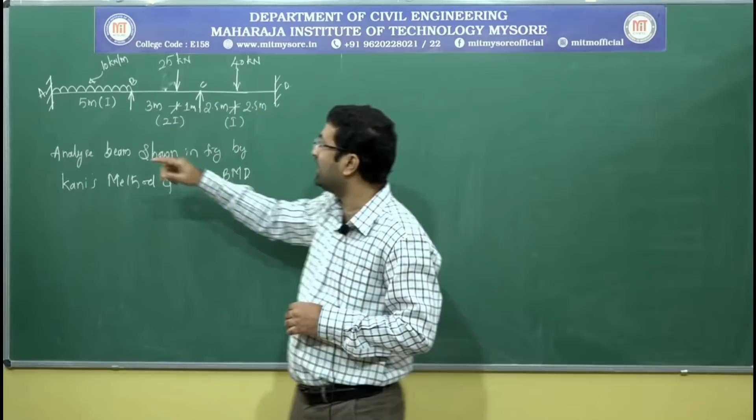Here you can see the variation of the I value. For span AB, the moment of inertia value is I; for span BC the moment of inertia value is 2I; and for span CD the moment of inertia value is I.

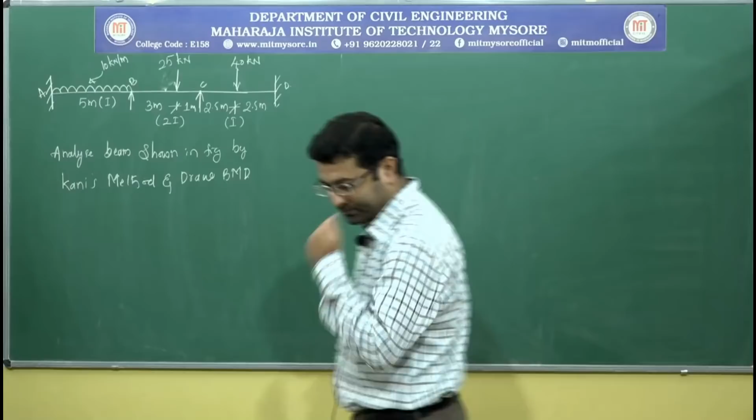We have to analyze this beam using Kani's method and draw the bending moment diagram. Here in the problem they have asked only to draw the bending moment diagram, so whenever that's the case there will be slight changes at the end - we don't need to calculate the support reactions. We can directly draw the bending moment diagram with the help of the second approach discussed in previous classes. As in the slope deflection method and moment distribution method, the first step in the analysis of a beam by Kani's method also remains the same: the estimation of the fixed end moments.

Let me start with the solution. Step one: fixed end moments.

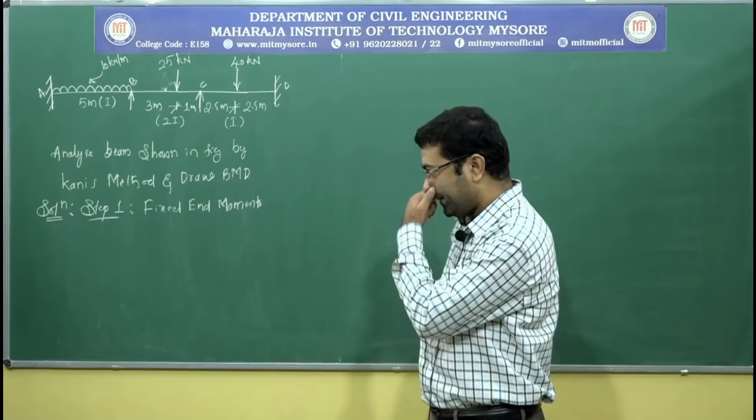From the last two modules we have been discussing how to calculate the fixed end moments, so here also we will use the same kind of formulas to work them out.

For the first span you can see we have a UDL on the span. So the fixed end moment for span AB, MFAB, is equal to minus WL square by 12. Here W, the magnitude of the load, is given as 10 kilonewton, so it is 10 into L. L is the span of the beam, which is 5 meters, so it's 5 square divided by 12, which yields minus...

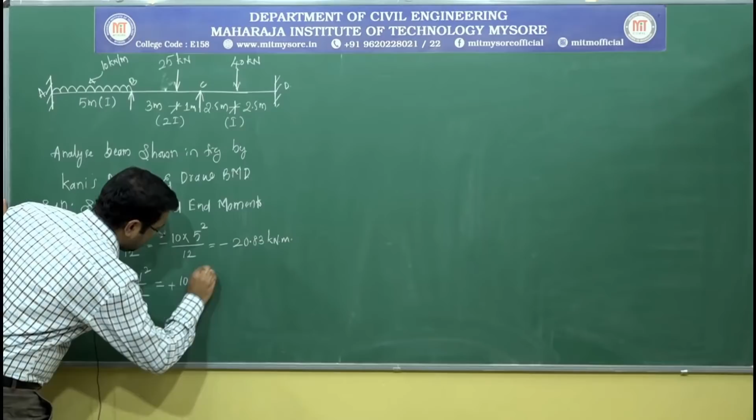...20.83 kilonewton meter. This is the fixed end moment for span AB at point A, MFAB. Now similarly I have to calculate one more fixed end moment at point B, MFBA, which is plus WL square by 12. Here only the sign changes, everything else remains the same, so you can expect the same answer, only the direction changes: plus 20.83 kilonewton meter is the fixed end moment at point B, MFBA.

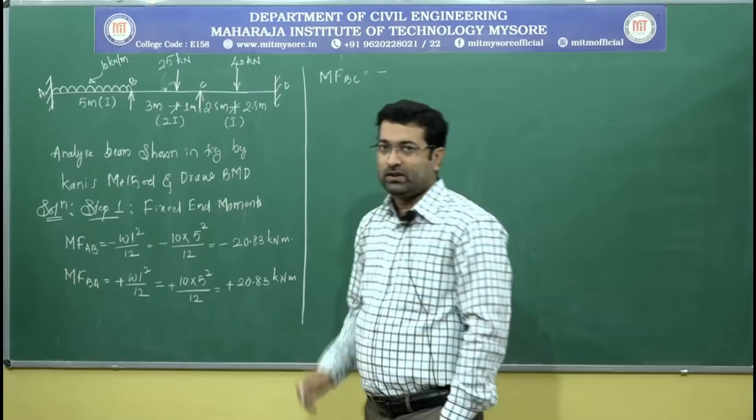Now similarly for the second span, span BC, we need to work out the fixed end moments. MFBC is equal to... on span BC we have an eccentric concentrated load, so as the load is eccentric we need to use the formula W A B square by L square. This is the formula to work out fixed end moments whenever we have an eccentric concentrated load.

So it's minus, here W is 25 kilonewton, so it is 25 into A. The distance A, from point B to the load, is 3, and the other distance is 1 meter, so it's 1 square divided by the total span squared, which is 4 square. This yields minus 4.69 kilonewton meter. This is the fixed end moment for span BC, MFBC.

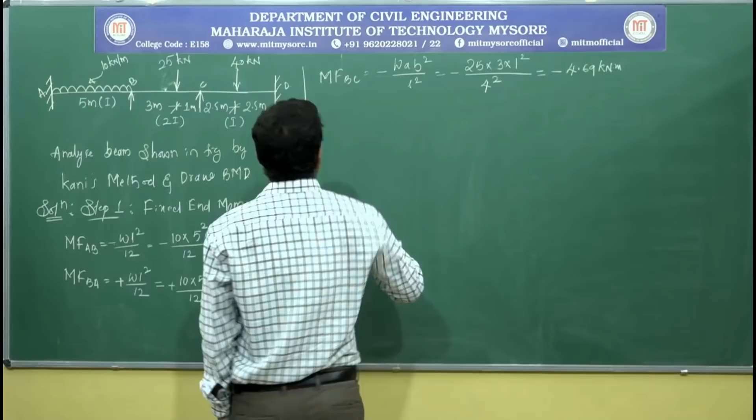Similarly, we need to work out one more fixed end moment for the same span, MFCB, which is equal to plus W A square B by L square. Here, the load is 25 into A square, A remains 3, so it will be 3 square into B, which is 1, whole divided by 4 square. This yields a value of 14.06 kilonewton meter, which is the fixed end moment.

So these are the two fixed end moments for span BC. Now similarly, we need to work out the fixed end moment for span CD, that is MFCD.

So you can see here on the span CD we have a 40 kilonewton concentrated load acting exactly at the center. So you can use the formula minus WL by 8. W is the magnitude of the load, that is minus 40 kilonewton. The total span is 5 meter, divided by 8, which gives you a value of minus 25 kilonewton meter. That is the fixed end moment at C.

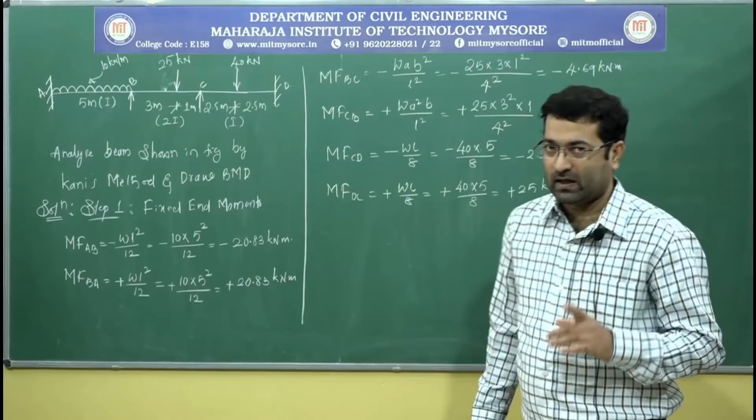Now we need to go for the second step. As I told you earlier, the second step is estimation of the relative stiffness and the rotation factors, which is very similar to the distribution factor what you have calculated in the moment distribution method. I will erase this.

Step number 2: relative stiffness, that is the value of K, and the rotation factors, which we have designated as U. So to calculate the rotation factors, we need to go for a table. The table is very similar to the moment distribution factor table what we have done in the moment distribution method. So here first

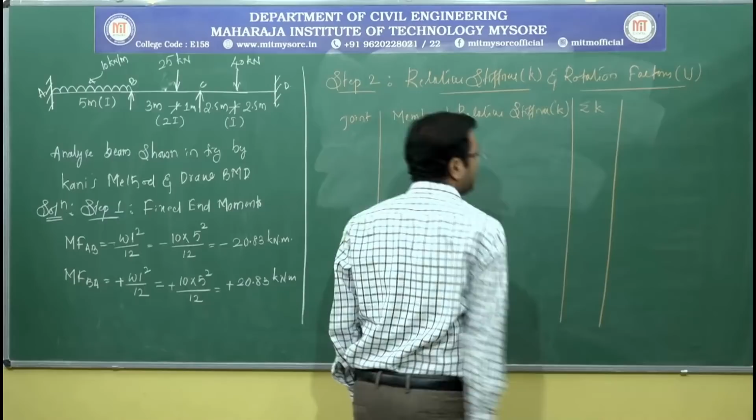We need to note down the joint, then the members at the joint. Then we have to calculate the relative stiffness, that is we need to work out the value of K. After the K, total stiffness, that is summation of K. Then we need to go for the distribution factor, which you already know. Then the last one is rotation factor.

Rotation factor u is equals to minus half of k by summation of k, or even you can write it as u is equals to minus half of distribution factor. Anything is fine, since k by summation of k is nothing but a distribution factor. So you can use any of the formulas.

Now, if I see the given loading diagram, you can see there are two intermediate joints, one is B and another is C. So I will note down them, one is B and another is C. Now at point B we have two members, one is BA, another is BC. So I will note down those here in the members: BA and BC.

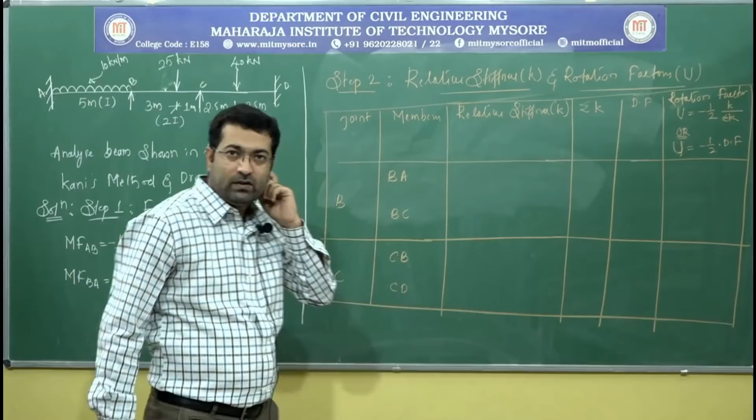The relative stiffness, the value of K, we need to determine. So to determine the relative stiffness, we usually observe how is the far end condition. For example, if I want to determine the relative stiffness for the BA member, B is the near end and A is the far end. So we need to work out the far end.

So here far end is fixed. For fixed far end, the relative stiffness formula is I by L. So how much is I value? I value is I, no change. So it is I by L, and L is 5 meter here. So this gives me a value of 0.2I, which is the relative stiffness of member BA.

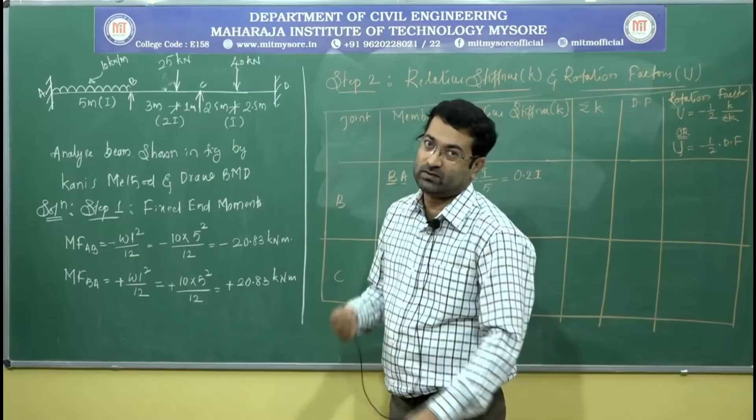Now for member BC, B is near end and C is far end. So how is the far end? Here it is a continuous or intermediate support. In structural analysis we treat all the intermediate supports as fixed. That is a basic assumption we made in structural analysis. All the intermediate supports are treated as fixed support. So C, it is an intermediate support.

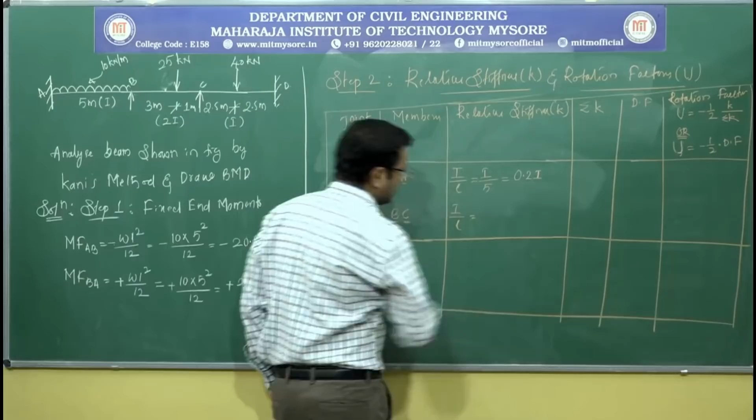So this support, even though actually it is simple in nature, it is treated as fixed. So now for BC member, C is far end, and since it is an intermediate support, we treat it as fixed support. For fixed support, the relative stiffness is again I by L. So I value here for BC member is 2I, and L is 4 meter. That gives you the value of K as 0.5I.

Similarly, if I come to joint C, for joint C we have CB and CD as the members. For CB, C is near end and B is far end. Here the far end is again, as like previous, an intermediate support, and all intermediate supports are treated as fixed. So it is I by L. The I value is again 2I.

L is 4 meter, so this is 0.5I. Lastly for CD member, C is near end and D is far end. Here for the given problem, support D is fixed in nature, so the relative stiffness is again I by L. I value is I, no change, so it is I divided by L. L is 5 meter. So this is 0.2I.

Now the next one is total stiffness at each joint. We have to work out how much is the total stiffness. We have two joints, B and C. For B joint, the total stiffness is 0.2I plus 0.5I, so it will be 0.7I. Similarly for C joint, we have two members, 0.5I plus 0.2I, so this is also 0.7I.

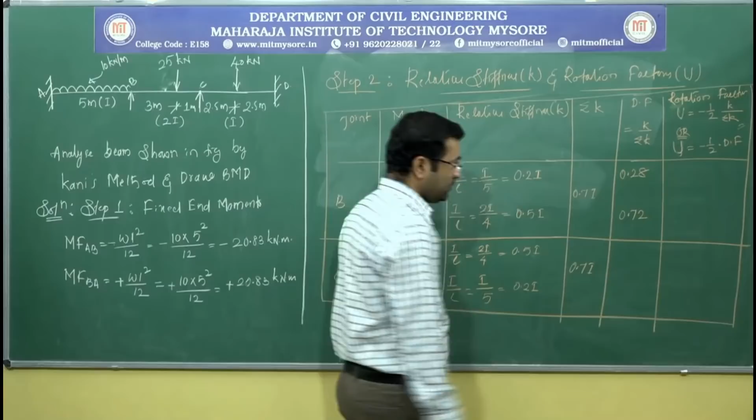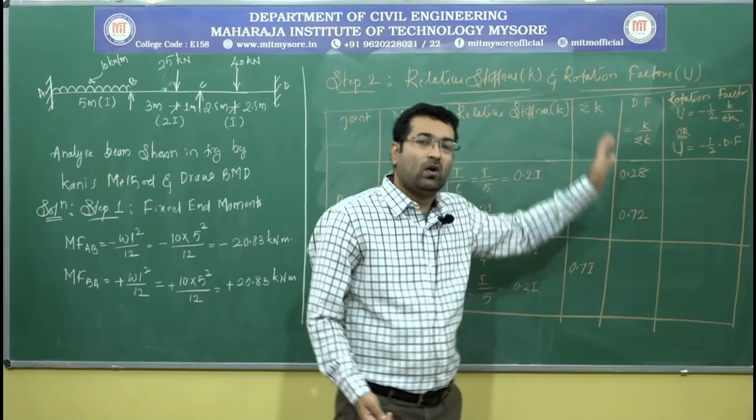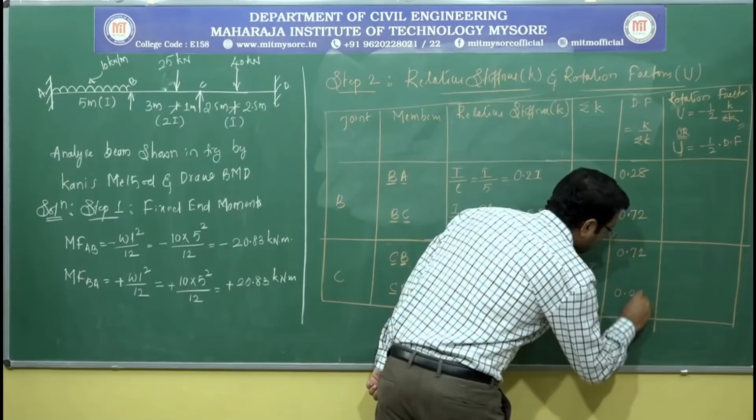Remember, the total distribution factor at any joint is exactly equal to 1. If you add these two, it should be 1. This is a cross check you need to do in step number 2. If it is not 1, assume your calculation has gone wrong, and all further calculations will be wrong, so please verify this. Similarly, 0.5 by 0.7 gives 0.72, and 0.2 by 0.7 gives 0.28.

Now the relative stiffness, rotation factor: the rotation factor equals either this formula or this formula, I will use this one. U is equal to minus half of the distribution factor. Minus half of 0.28 is minus 0.14. Exactly half of this, just use the negative sign. Half of 0.72 is minus 0.36. So minus 0.36 minus 0.14.

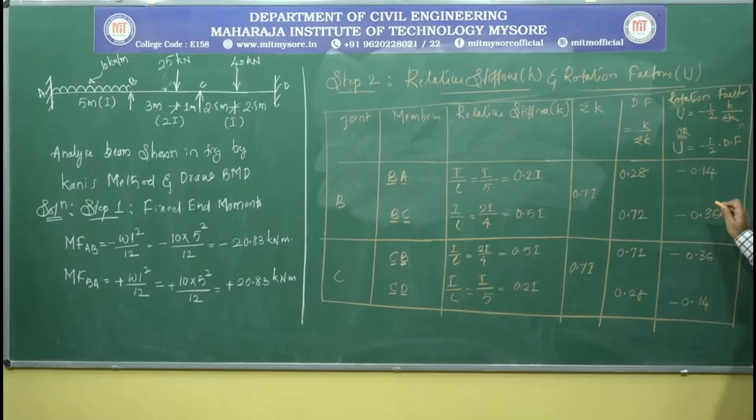Now here we have one more cross check. As like the total distribution factor at any joint must be 1, the total rotation factor, at any joint must be minus 0.5. So if you add these two, it will give exactly minus 0.5. Similarly minus 0.5. If these values are correct, then step number 2 is correct.

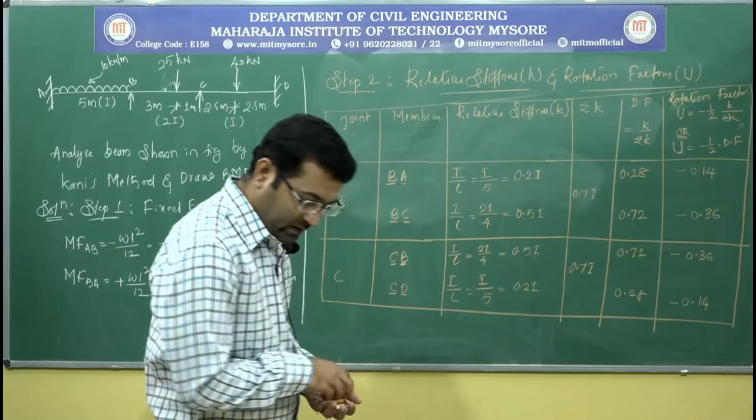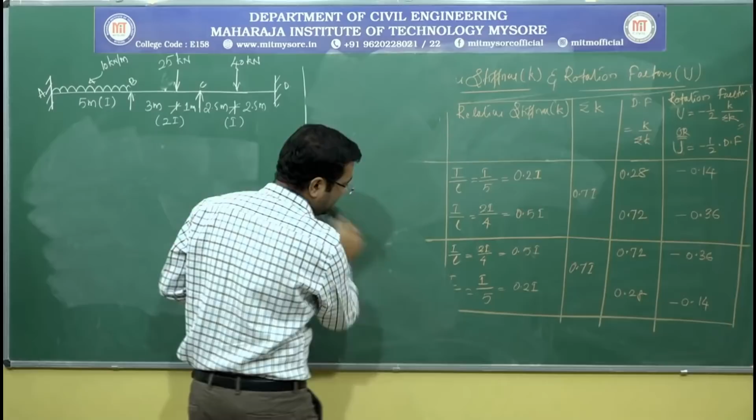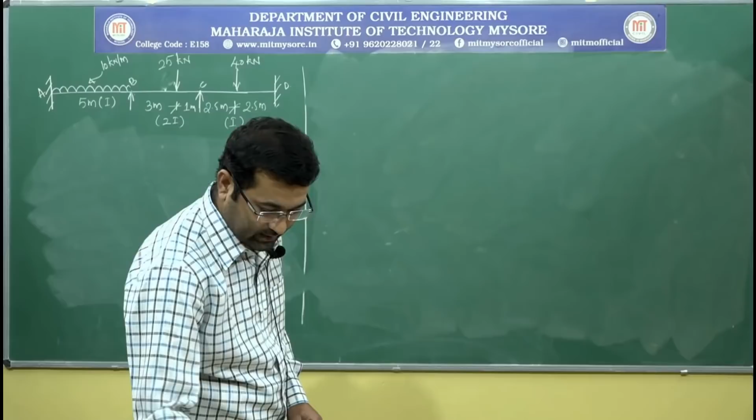So now we need to go for step number 3, which we call Kani's table. This is step number 3, the Kani's iteration. It is a kind of iterative step, like a moment distribution table, where we calculate many values again and again. Here in this step we calculate the rotation contributions, which we discussed in the last class.

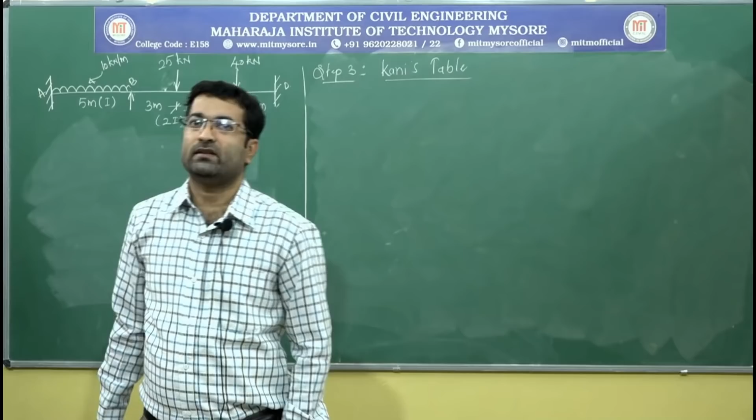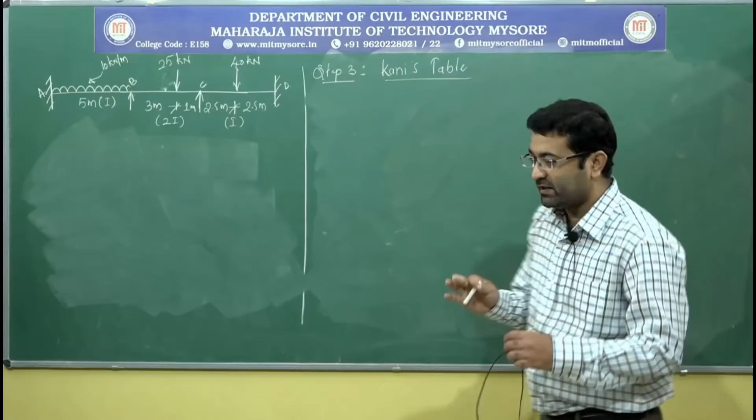Step 3 is Kani's table, or you can write it as Kani's rotation table, Kani's rotation contribution table. I would like to keep it simple: Kani's table. Here the representation of the table is a little bit different. It is not just a table, it is something different. Let us see how Kani has represented the table.

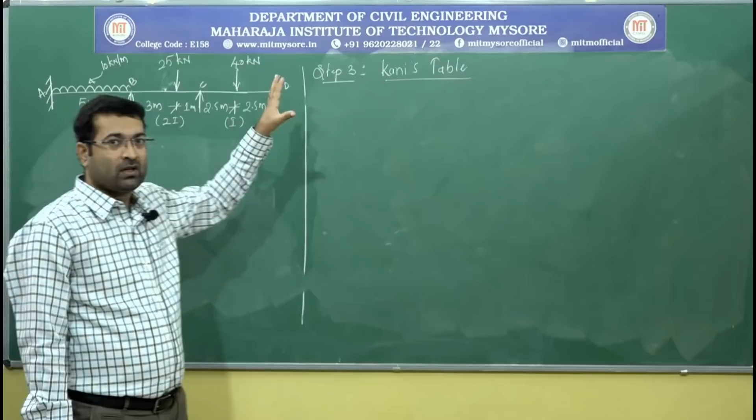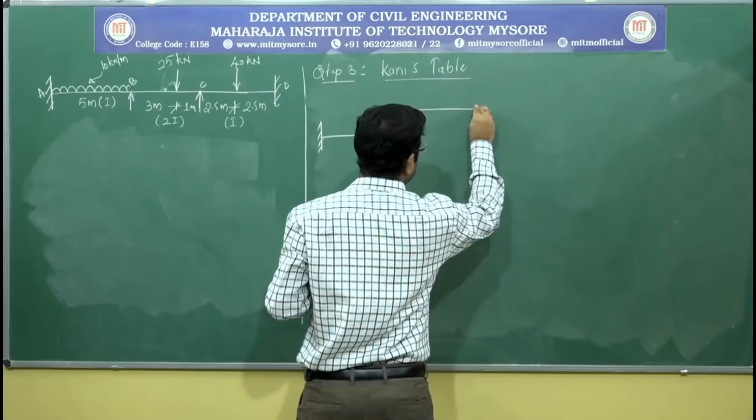Kani has shown the given structure or frame as it is, replacing all the intermediate joints by boxes, and not shown any given loadings. I will show support A as it is, then span AB as it is, no change. Now instead of an intermediate joint, I will represent the joint by a box. Next, I will represent span BC as it is, and now I will show joint C by another box.

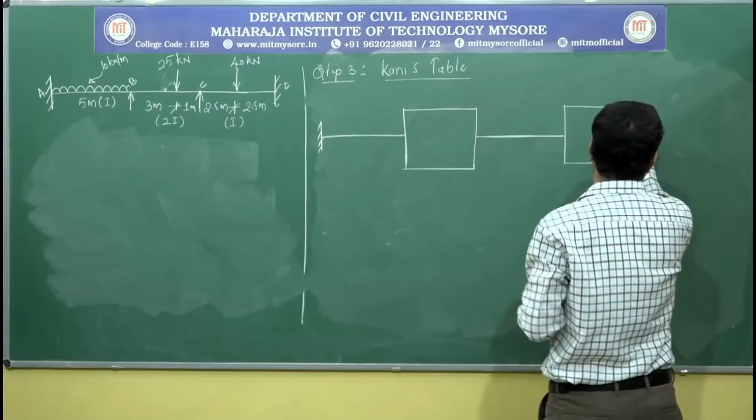Okay, then I will show the span CD as it is, then the support D. So here what we have done, we have just replaced the joints by boxes. So I will go for a little more further modification. In these big boxes, I will show one more small box, okay, and I will join these lines. So this is how Kani has represented the joints.

Similarly, here also, okay, so we will join these, right. So this is end A, as we know, this is joint B, this is joint C, this is joint D. So this is how Kani has represented the table, okay. So it is not just like the other tables, it is something different.

Now, what are the things we need to note here? So first of all, we have calculated the fixed end moments. So we have to represent all the fixed end moments in the Kani's table. So here the fixed end moments we have to represent somewhere here.

The fixed end moment for member AB, that is MF AB, it is minus 20.83. Here I will not mention the units, units are kilonewton meter, because we need more space. So it is 20.83 kilonewton meter, and MFBA, here I will represent it as plus 20.83, okay. And here that is MFCB.

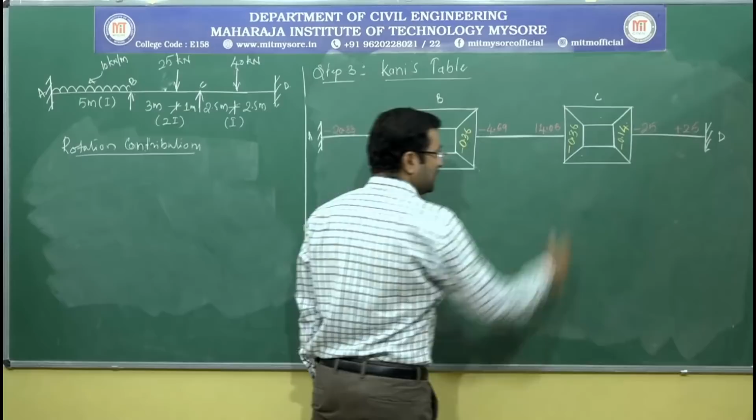So you see m dash AB, this is the rotation contribution at end A, which we are not calculating or we are not worried about. Similarly, m dash DC, that is the rotation contribution at end D, we are not calculating that value also. What we are calculating is m dash BA, m dash BC, m dash CB, and m dash CD. So we are working out or estimating only these rotation factors at the intermediate joints, right.

Now, as per our understanding from the previous classes, the rotation contribution m dash is equal to U, that is the rotation factor, into the algebraic sum of fixed end moments at any intermediate joint, plus the algebraic sum of far end rotation contributions. So this is the formula, right.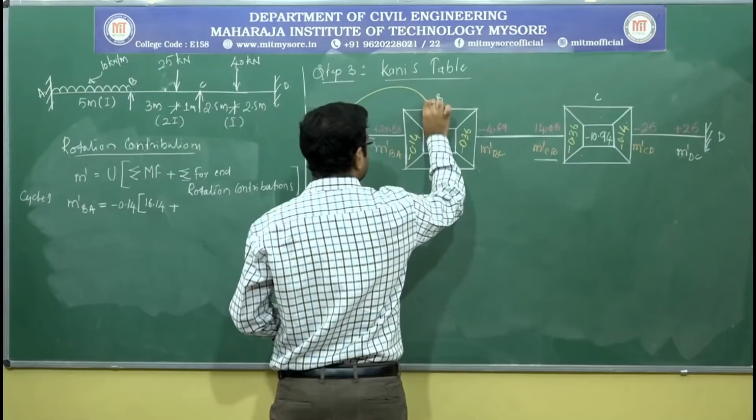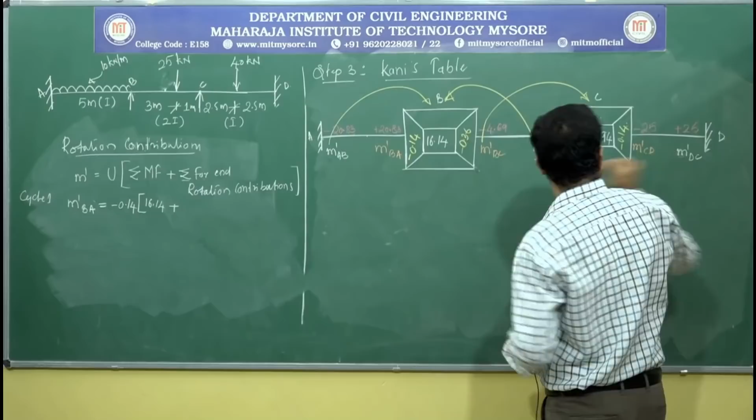I will show a simple diagram to help you understand. Whenever we are calculating values at joint B, for BA and BC, to calculate the rotation contribution for these two members we need to consider these values here, and we need to use them. Similarly, when calculating the rotation contribution for M dash CB and M dash CD, we need to use these two values for the calculations. If you draw this, it will be very helpful for you to understand.

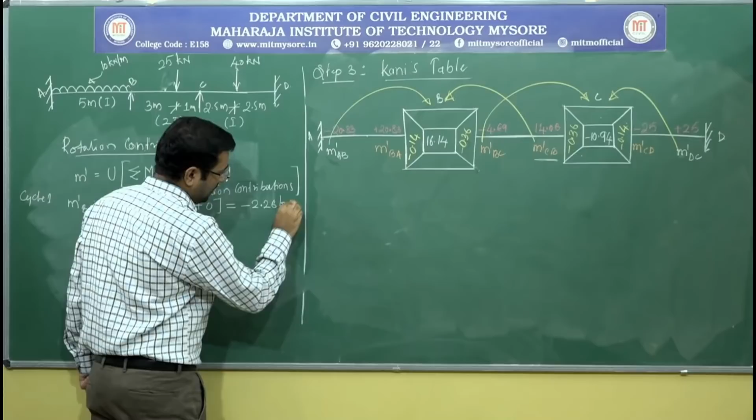Now see here, the far end rotation contributions. For joint B we have two members and these are the two far end rotation contributions. Right now these two are 0 because in the first cycle we have not done anything, so it will be 0 plus 0, 0 plus 0. This gives you a value of minus 2.26 kilonewton meter, which I need to write here below this, that is minus 2.26. So this is one rotation contribution value in the first cycle.

Similarly, we need to work out M dash BC, M dash CB and M dash CD. All are calculated exactly the same way. Now to calculate M dash BC, again I will use the same formula, that is rotation factor. The rotation factor for BC is minus 0.36, into the algebraic sum of fixed end moments for joint B, which is 16.14, plus the far end rotation contribution for joint B.

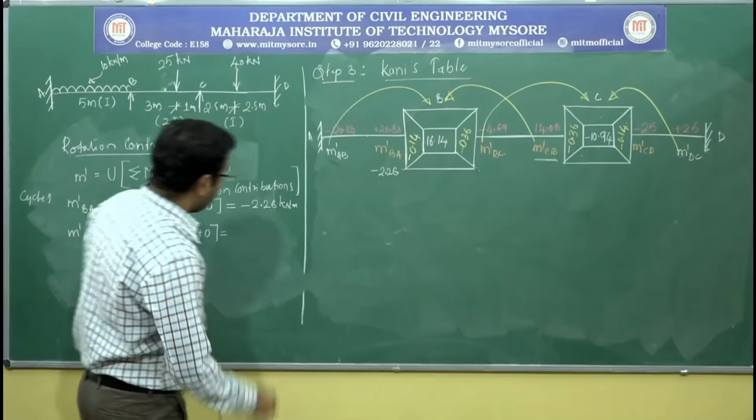These two are the far end rotation contributions, right now they are 0, so I will use 0 plus 0. In the first cycle they will be 0, but not from the second cycle onwards. So this gives me a value of minus 5.81 kilonewton meter, which I need to represent here as minus 5.81.

Now M dash CB. Again I will use the same formula, that is rotation contribution. The rotation factor for CB member is minus 0.36 into the algebraic sum of fixed end moment at joint C, which is minus 10.94.

Plus the far end rotation contributions. What are the far end rotation contributions for joint C? They are M dash BC and M dash DC. Here M dash BC we have got the value, so I need to use that in the calculation, that is minus 5.81, plus M dash DC, which is 0. So this gives me a value of 6.03.

6.03 kilonewton meter. So that I need to represent here, 6.03. Now the last value, M dash CD.

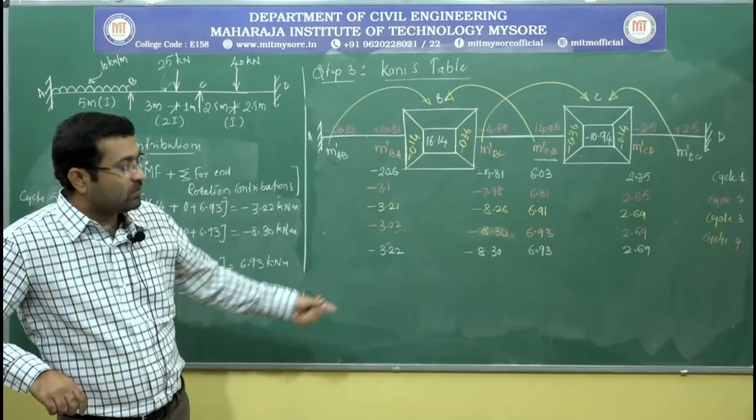2.69. So whenever the values have repeated, you can say that we can close the iterations, or we can close the cycles, because even if you go for further cycles you will get the same values. So no need to do the repeated calculations again and again.

So what I will do is finalize these rotation contributions. These are the final rotation contributions which we need to use for the calculation of the end moments. Now tell me one thing, what is the final rotation contribution for M dash AB? It is 0. It is 0, and similarly the final rotation contribution for M dash DC, that is also 0, right?

So using this we need to go for the calculation of the final end moments, that is step number 4. Final end moments. So in the previous class we have seen an equation to calculate the final end moment, so that I will use, and which will remain same for all the members.

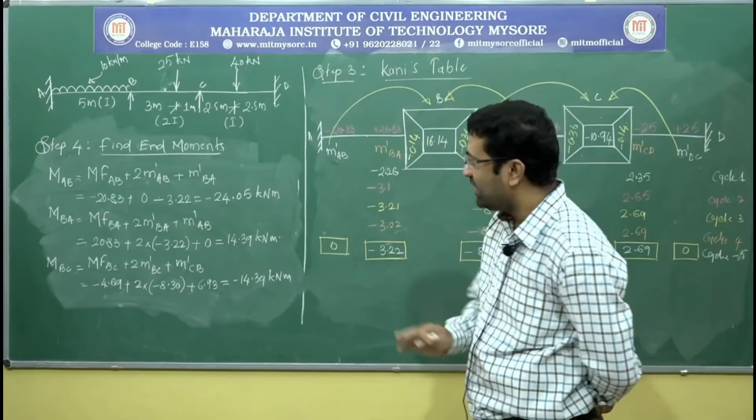If they are equal and opposite, then we can say that our calculations are correct. If they are not equal and opposite, then you can straightforward assume that your calculations has gone wrong. So please verify your calculations.

In the similar way, if I calculate the remaining things, that is M dash CD, M AB, BA, BC, CB. M CB is equals to MF CB plus 2 times of M dash CB plus 1 times of M dash BC. So MF CB is 14.06.

Plus M dash CB is 6.93, so it is 2 times of the 6.93 minus M dash BC is 8.30, which fetches a value of plus 19.62.

Kilonewton meter, right? And for the last span, MCD is equals to MFCD plus 2 times of M dash CD plus M dash DC. That gives me a value of...

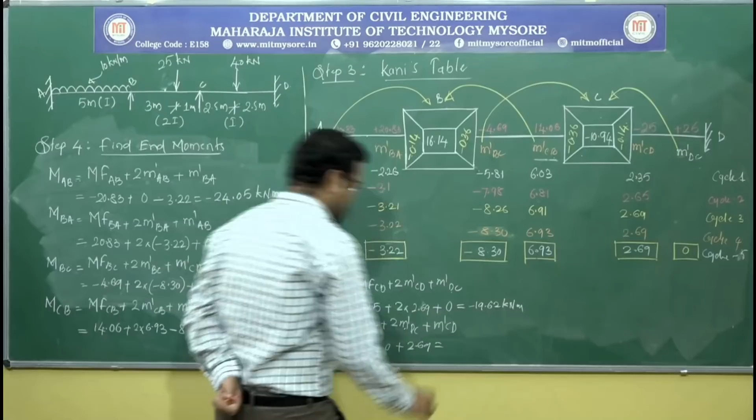minus 19.62 kilonewton meter. And lastly, for MDC is equals to MFDC plus 2 times of M dash DC plus 1 time of M dash CD. So it is plus 25 plus M dash DC is 0 plus 2.69. That gives me a value of 27.69 kilonewton meter. So these are the final end moments as per the Kani's procedure.

So once we calculate these end moments, we need to represent them into the loading diagram. Okay, so MAB,

As per our calculation, it is minus 24.05. Minus 24 means it is a negative value, so we need to represent this as anti-clockwise in the direction. So here it is,

24.05 kilonewton meter, and MBA, as per our calculation, we got it as positive value 14.39. So positive value indicates it is clockwise in the direction. So let me represent a clockwise moment here. It is 14.39

Kilonewton meter. So MBC, same value but opposite in the direction, anti-clockwise. So here it is clockwise. Next I will represent this. You can see here it is anti-clockwise, but the magnitude will remain same, equal and opposite. So the joint is in the equilibrium position.

For CB member, you can see it is 19.62. It's a positive value. Positive value means it is clockwise in the direction, right?

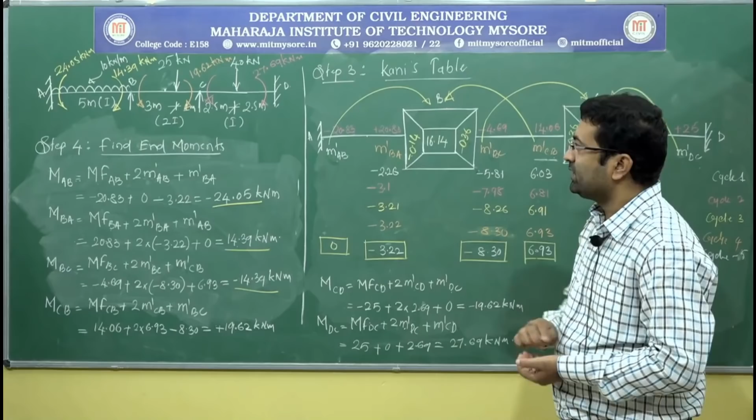So in the problem we can observe that they have asked us to draw only the bending moment diagram, not the shear force diagram. So as they have asked only bending moment diagram, we can draw the bending moment diagram without any further calculations.

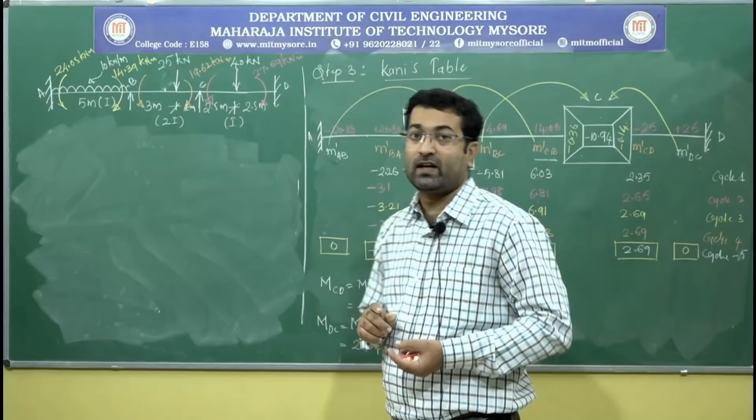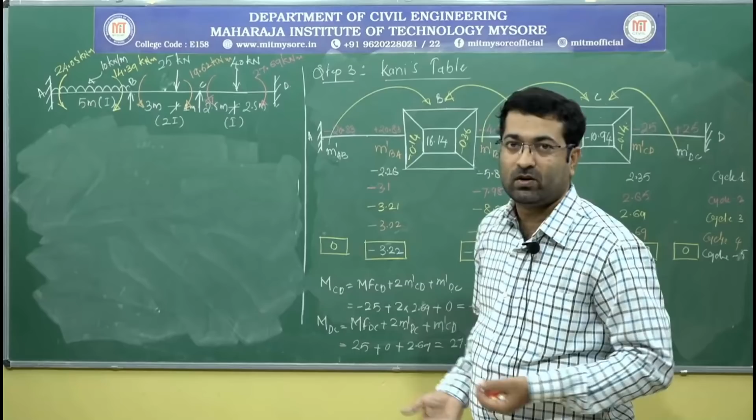But if they have asked us to draw the shear force diagram also, then we need to go for one more step, that is support reactions and the maximum bending moment calculations. So that part is not here, it is not asked in this particular problem, but in the next problem they will ask, or it will be there in the given.

So what I will do, I will straight away draw the bending moment diagram. I will just extend the projection lines so that it is easy for us to draw the bending moment diagrams.

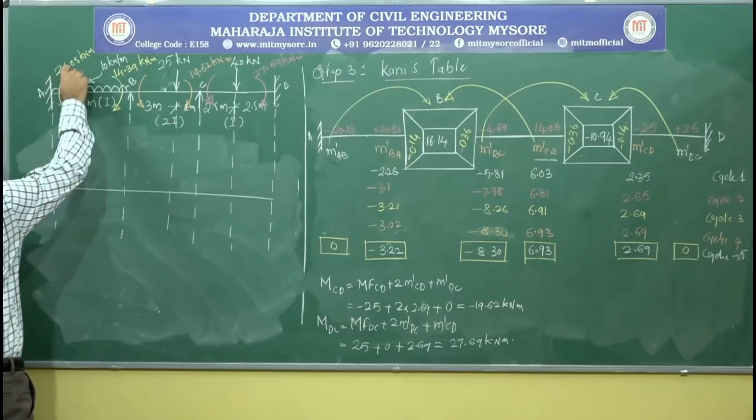Now you can see the bending moment at A is 24.05 kilonewton meter, and at joint B it is 14.39 kilonewton meter. Here it is 19.62 kilonewton meter, and here it is 27.69 kilonewton meter. So straight away you join all these bending moment values.

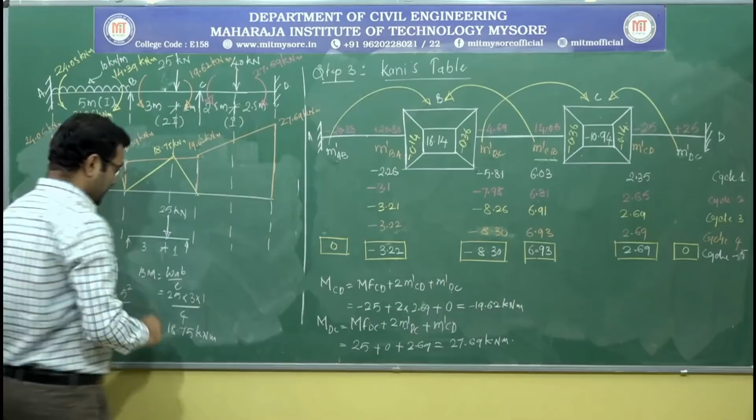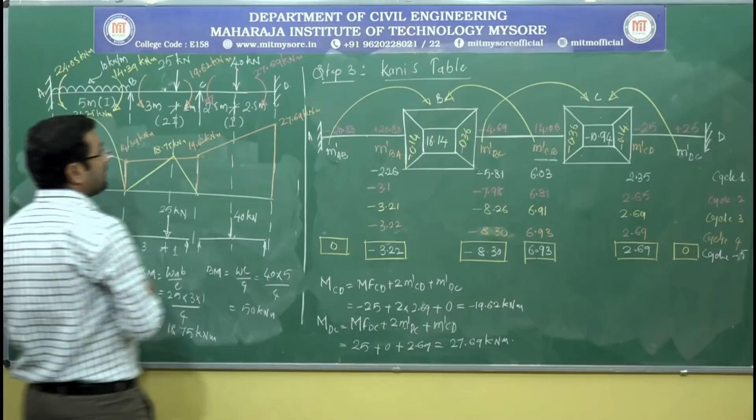For the third span, a central concentrated load of 40 kilonewton is acting, and the maximum bending moment is calculated using the formula WL by 4. So W is 40 kilonewton, L is the total span of 5 meters, divided by 4, giving a value of 50 kilonewton meter, which I need to represent. So here it will go a little up, because of the concentrated load the variation is linear. So this value is 50 kilonewton meter.

So here what we do is take this as the datum. The bending moment diagram above the line will be positive, and below it we treat as negative. So this also we treat as negative. It is very little positive, this is negative, this is positive, this is negative.

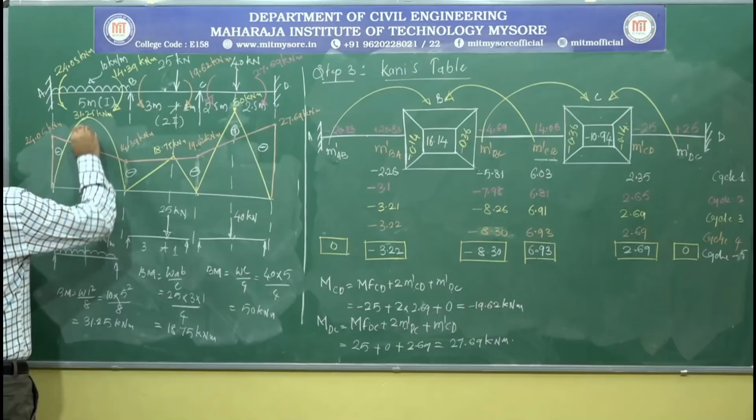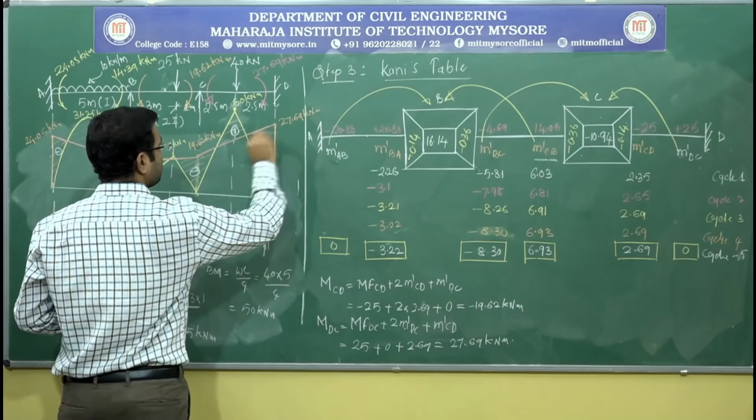So this is how we need to draw the bending moment diagram if they ask to draw only the bending moment diagram. If they ask to draw the bending moment diagram as well as the shear force diagram, then we will have to go for one more step of calculations, that is support reactions and the maximum bending moment. Then using those values we need to draw the shear force as well as the bending moment diagrams.

So I hope you have understood how to use Kani's method and how to calculate the rotation factors and the rotation contributions in Kani's table, and how to use those rotation contributions to calculate the end moments.

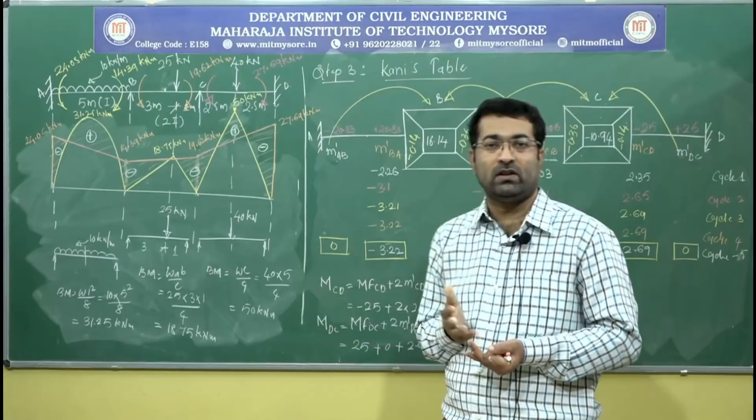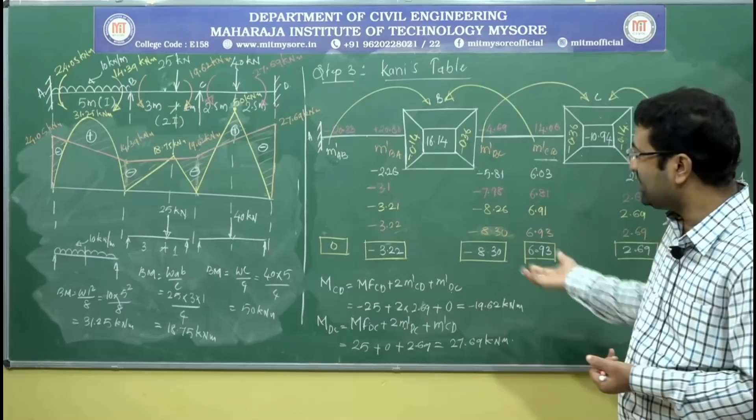So to summarize, first we have estimated the fixed end moments, then we have calculated the rotation factors using the same table as the distribution factor. Using the distribution factor values, we went for one more step of calculation as rotation factors. We used those fixed end moments and the rotation factors to calculate the rotation contributions in Kani's method, repeating the calculation until we achieved the repeated values. Once we got these values, we estimated the end moments.

So this is how we need to use Kani's method to analyze a beam. Thank you.